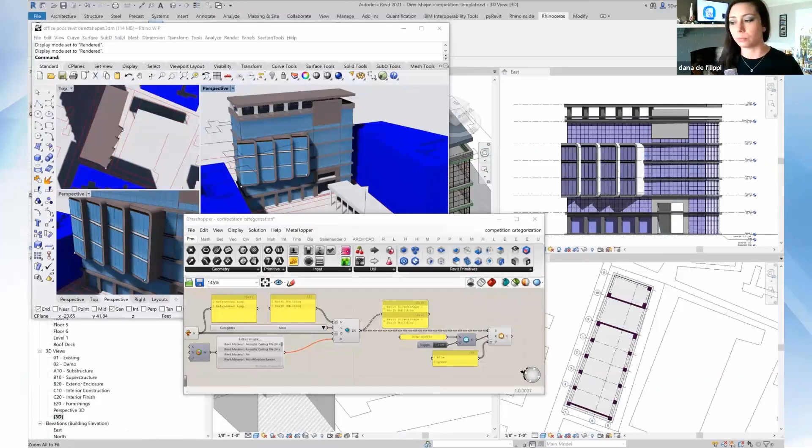So without further ado, today we have a really, really awesome presentation. Very, very excited about it. Rhino-Inside.Revit. And today we actually have two of McNeel and Associates. We're very lucky to have them. First off, Scott Davidson. He's in business development at McNeel. You can find him on LinkedIn there. And also Ehsan. Ehsan is amazing. Hopefully you guys have heard of Ehsan by now.

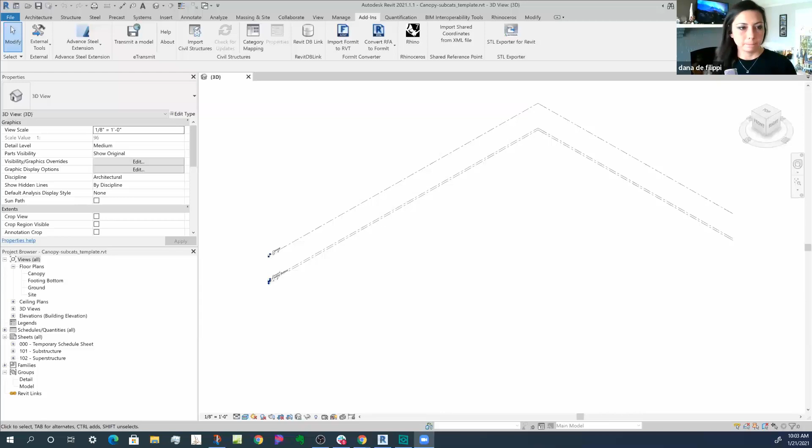I guess we'll give a little presentation today about Rhino Inside Revit. And then hopefully it'll be short enough that we have a long time to discuss, and Ehsan and I can answer any questions you have, whether about what we have or what we're working on or what our plans are, all those kinds of things. And just so you know, Ehsan's the Revit expert here, so I'll do my best as I struggle through this, and then we'll go from there.

Hopefully everybody can see my screen, which is Revit. So let me just give you a quick background as to what's happened and what Rhino Inside Revit really is. So Rhino 7 was just released a couple months ago as a commercial product. So it's out of beta, it's in release mode.

And Rhino 7 has a special property to it in that it can be embedded inside other applications. There's a connection to Tekla, it runs inside of Unity and Unreal actually, and different places, BricsCAD, things like that. But one of the most exciting ones, ones that we did early on and discovered that it actually worked, is we're able to now embed Rhino inside Revit's memory space.

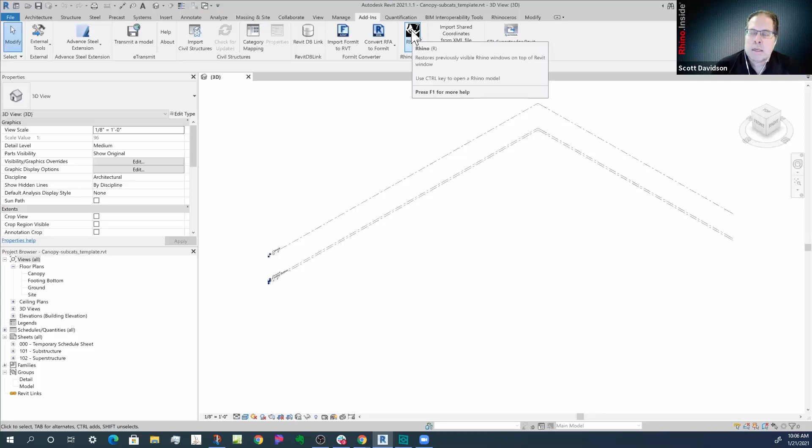And what that does is it adds, on the add-ins tab, this little Rhino button. And it's important to understand that normally when Revit starts up, you'll get that button, but it doesn't use a Rhino license yet. Once you click on this, it will try to load Rhino and Grasshopper inside Revit's memory space. And if it's successful doing that, it will come up with this toolbar.

And there's different things that you can do here. You can start Rhino, which we're going to do in just a second. We can import 3DM files directly using our 3DM importer as opposed to the one that comes with Revit. And we can categorize things and put different direct shapes and categories. We can turn off and on preview. We can actually edit Python here.

This is actually the Rhino Python editor, but the Rhino Python editor can access both the Revit API and the Rhino API simultaneously. So you can actually write Python scripts now that include both APIs and both calls, and you have the whole of the Rhino geometry kernel available to the Revit API in Python and in C# for that matter. So we can start Grasshopper and some other pieces here.

We also have what we call a Grasshopper player, which some of you might be familiar with players in Revit, so you can write commands with Grasshopper and just play them. Another important piece, as we talk about PyRevit: PyRevit has the ability to make custom toolbars, and those can include Python, Grasshopper and Dynamo scripts. So you can create your own custom toolbars with all your custom routines with PyRevit and Rhino Inside.

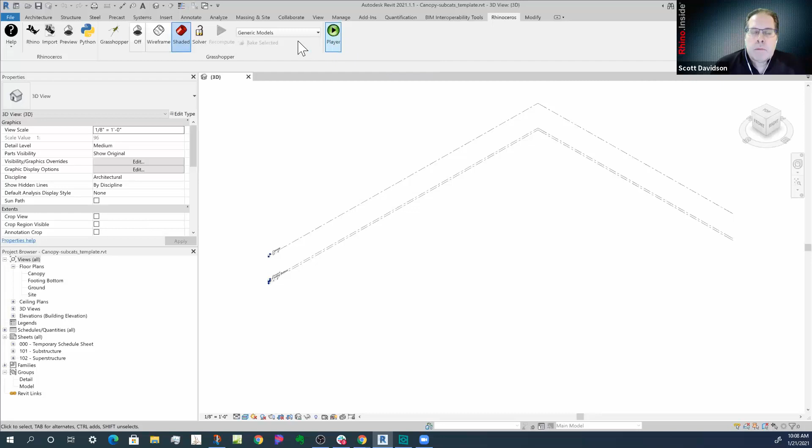So let me just show you how this works really quick. When you start Rhino, you hit here and it starts up Rhino. This is just standard everyday Rhino 7, but it does know it's running inside of Revit. And so when I start up Grasshopper, there's a few new toolbars that come up when you're inside Revit. So this is Grasshopper running inside Rhino inside Revit. So it starts to understand the stack there.

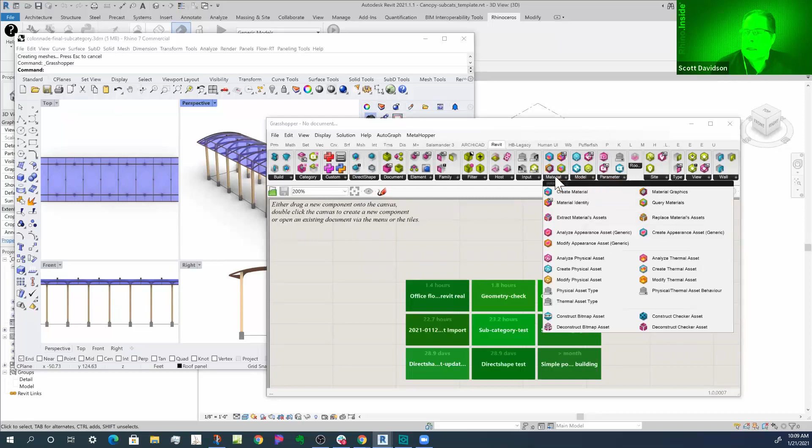So you can see we have different kinds of Revit primitives here that we can access directly through Grasshopper. We also have a Revit toolbar, which has things like being able to add beams and columns, deal with categories, create direct shapes, deal with families. We can interrogate elements, and we have a really extensive way of working with Revit materials directly. So you can actually use Grasshopper as a material editor in Revit, which is fun. We can deal with parameters here.

We have a whole section on walls because walls themselves are a fairly sophisticated category or family, so they have their own piece here. And we keep adding to these. These are things that we continuously add to, so there'll be more and more of those. But that's where you find how you can do things in Revit.

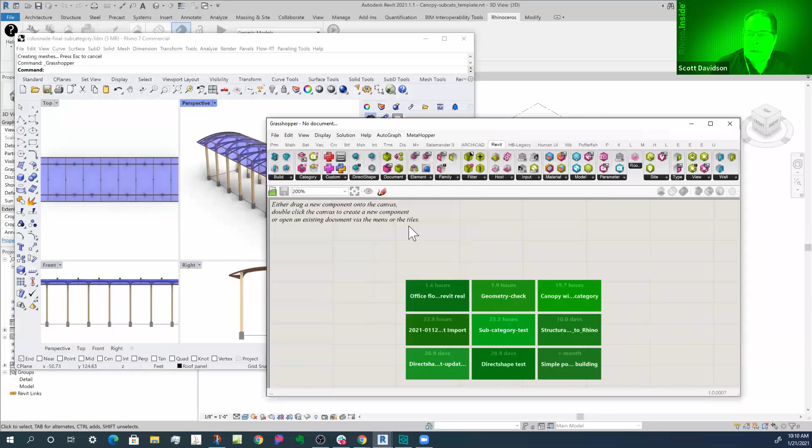And so let me just open an example here so you can kind of get an idea how this works. I think we'll start with this one here. One of the things we were trying to solve at the very start of this was people were complaining and wondering, how do I get my Rhino geometry? A lot of people use Rhino for design. How do I get my Rhino geometry and move it into Revit? And so this is kind of the initial question, and we can do that in a number of different ways.

And this is one of the nice parts about this connection now, is that you can do it with direct shapes. I have examples where we're throwing 100,000 elements into direct shapes. It's very, very quick. You can use them in drawings really quick, for a competition or something like that. But we can also be more rigorous or intentional on how we get things across.

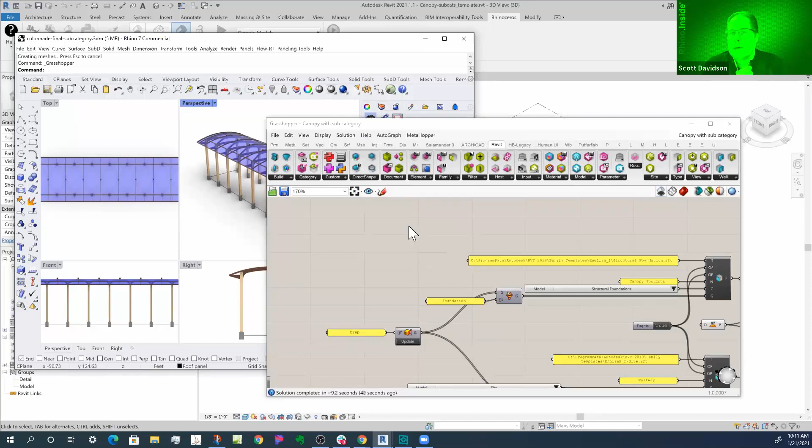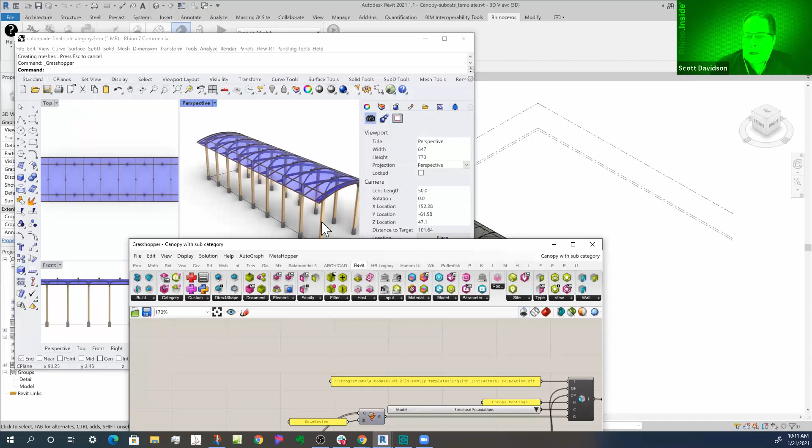And so in this case, what I have is, let's say this is a canopy here that's custom built. It's going to be dropped out on site. And one of the things I need to do is I have these footings that we need to have the footing person kind of put in. And then we're going to have this other piece fabricated and we're going to drop that in. So the Grasshopper definition can actually reflect that.

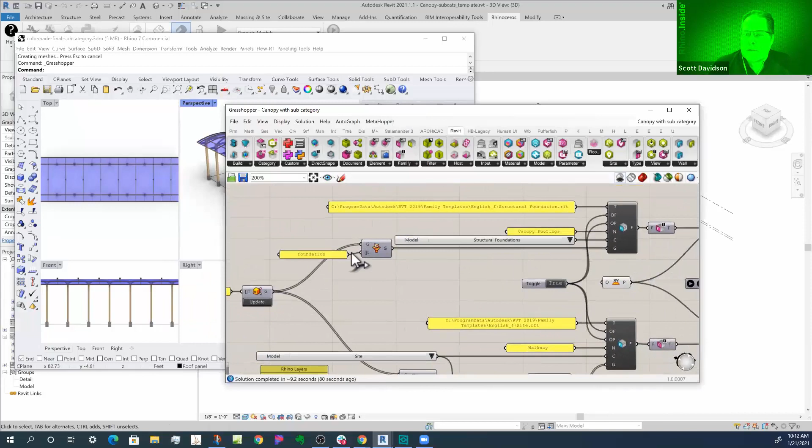And again, I'm using Elefront, which is a plugin for Grasshopper that's free. And it allows me to select objects by type over in Grasshopper or Rhino. So in this case, I'm grabbing all the B-reps. I'm finding everything on the foundation layer, which are all these concrete pieces there. And then what I'm doing is by going to family here, I can create a new component family. So that's right here.

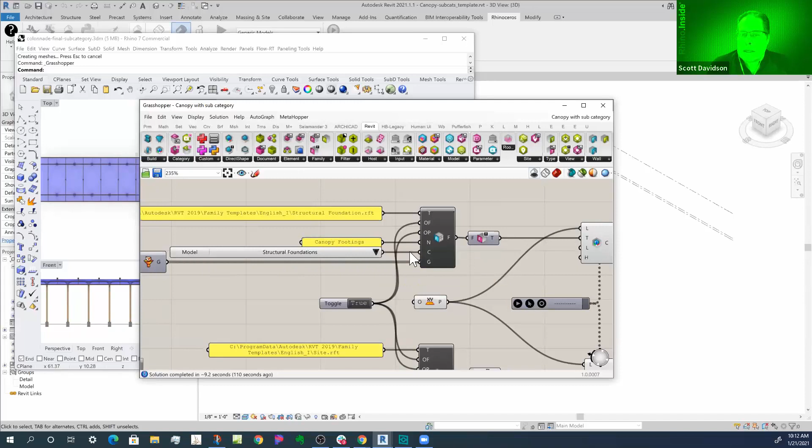And the new component family is going to be a structural foundation template here. You can see that. And it's in the structural foundations category. And then it's named canopy footings. And so what it does is it takes all that geometry, wraps it up in a new family. Of course, those of you that are really familiar with Revit know that you don't insert families, you insert types. And so we have a little unit here that goes and finds the types in this family, which is only one because it's a component family.

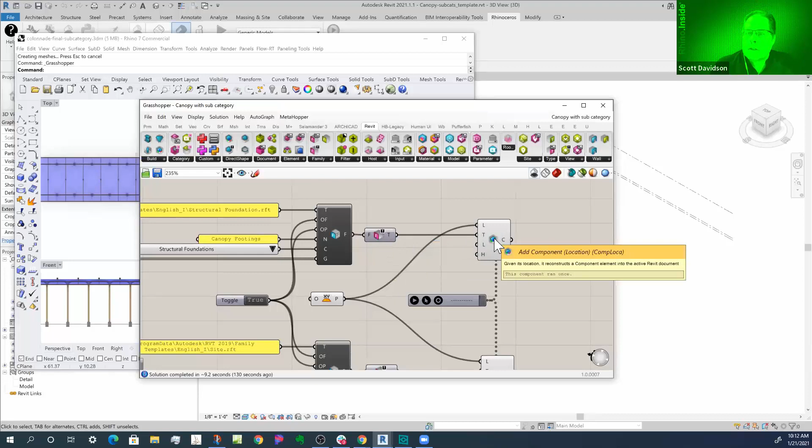And then what we can do is we can insert that family into Revit. And so you can see here that we have these footings here. They're a component family. Each one of these could have been an instance, by the way, of a single type, but in this case I was lazy and I made them all one. But you can see we have the canopy footing here.

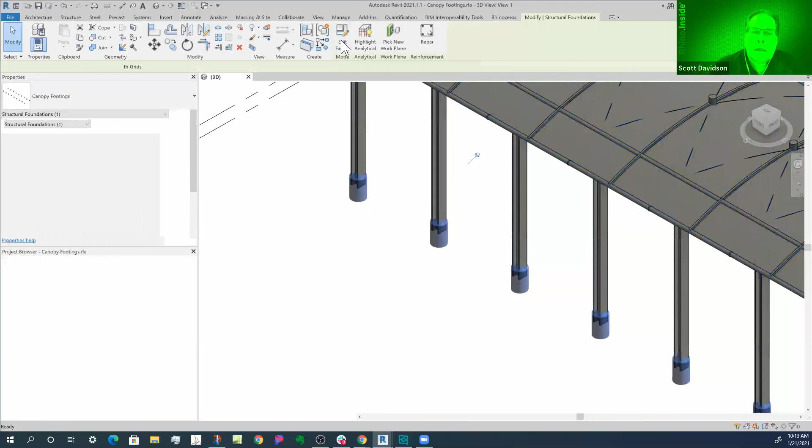It's structural foundation type. And what I can do, which is really interesting here, is because these are B-reps in Revit now, I can actually edit this family here. I can grab these objects, and there's some light editing that I can do to these, even if Grasshopper and Rhino weren't around. Now I'm not going to save this change because of course Grasshopper is in control right now. It'll just change it right back. And I can disconnect that connection. But you can see that I can make real families with real geometry through this.

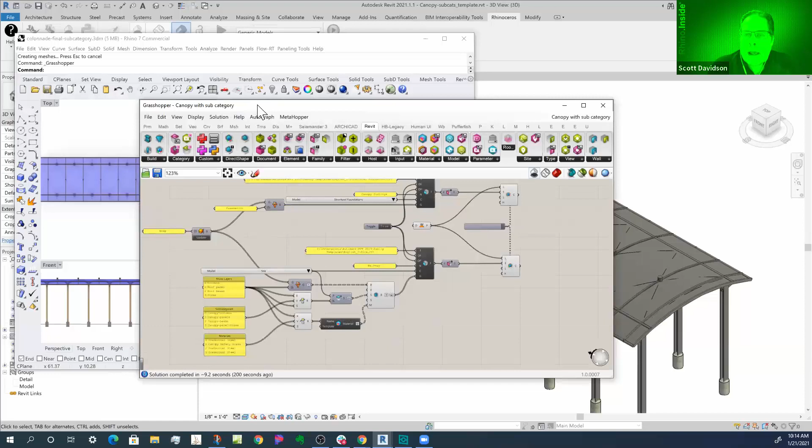And so I'm just going to close this, and we'll get back to the overall model, hopefully. And so there we go. So now let's take a look back at a little bit more about this definition. So I'm over on this side, and there's a lot more happening in the rest of this. I've got some roof panels and some columns and things like that.

And so what I can do here is, using Elefront and some other filtering, we can go through and I can actually say, here are the layers of the objects in Rhino. And then I can map those to subcategories in Revit. And so here's the subcategories I'd like to use right here. And in fact, I can actually assign materials to those objects too. I do a little sorting of those. And then I can create the subcategories if I need them.

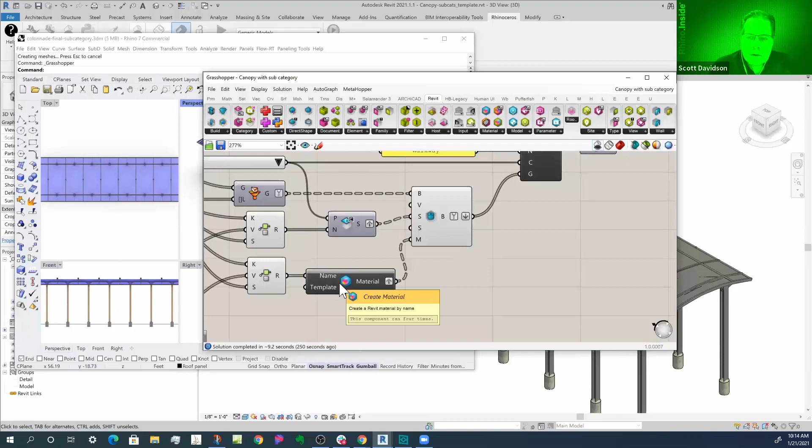I can also create the material names if I need them. If they don't exist, they'll get created. Then I push those all into essentially a form mixer, which mixes all the subcategories with the forms and all those pieces.

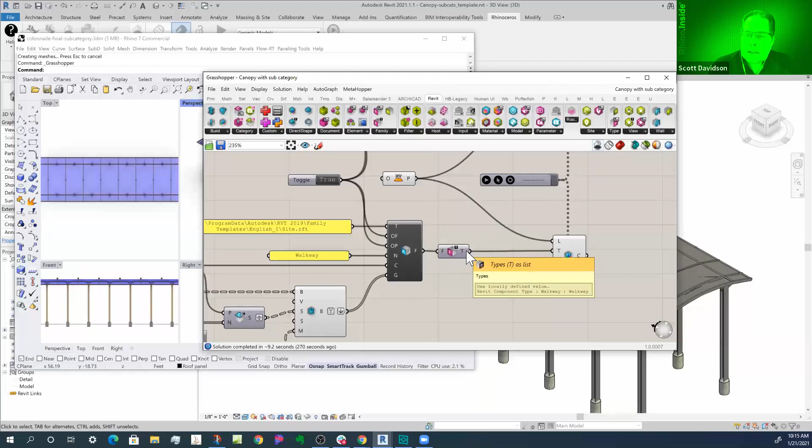Then we get to the family again, a new family. This is on a site family because I'm going to use subcategories, so I've got to find a category or a family I can use subcategories on. We're going to call it walkway. I mix that all up, find the type like I did before, and insert it. And what I get over here is a family with all the different subcategories and pieces like that.

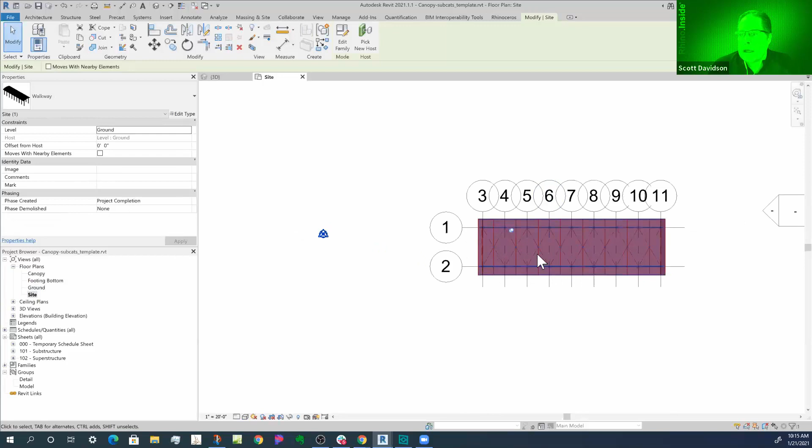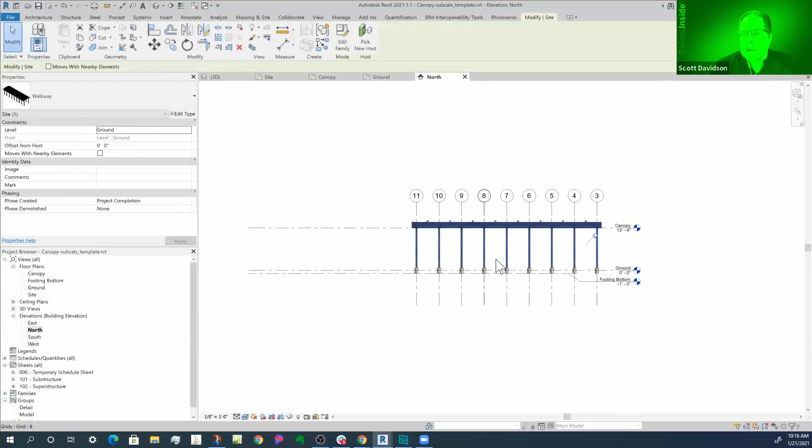And then you can see what I can do here, using subcategories, let's see what I get here. I can go through and actually change graphically how these things look based on the different subcategories, using view filters and all those things. So you can really start to inform the BIM model, create the BIM model in a way that works well in your Revit schema. That's one of the big advantages you have here.

And of course that can change over time. For instance, you might have floor plates that are official, but you might still be working on the facade. So the facade might be direct shape objects, which you're going to use temporarily until the facade settles down in the design. So there's a lot of options here for your workflow.

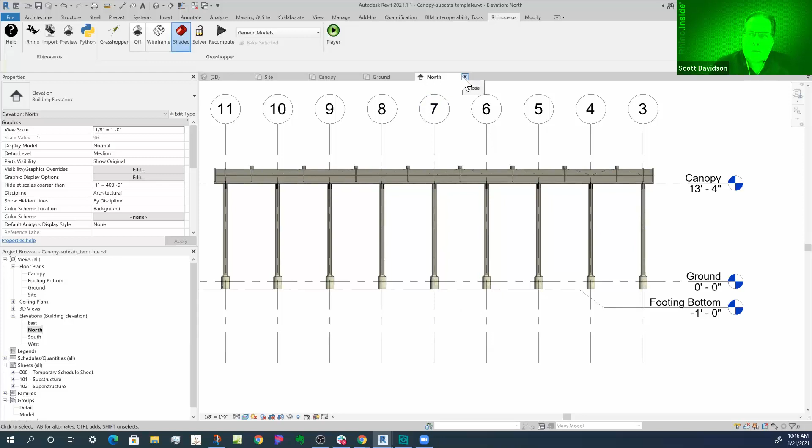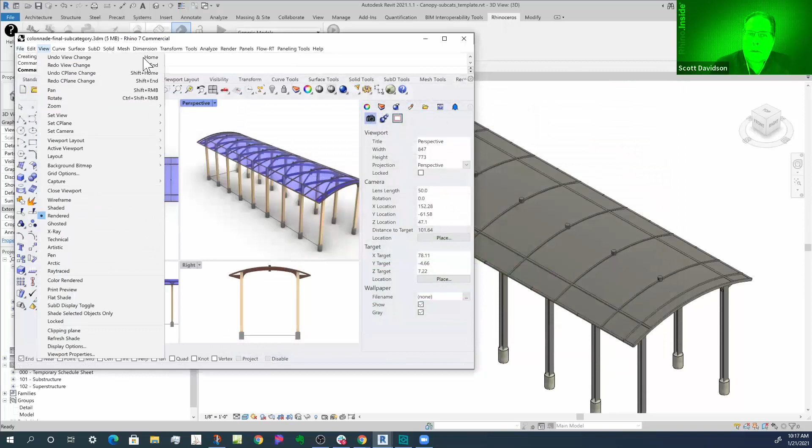Now, we don't just do forms and we don't just do direct shapes. We can also drive native families, system families. So I'm going to jump out here and show you how we might do that a little bit. I'll close this. I think we'll leave that one open for right now. Let me close this and get on to a different template here.

So when you move on to doing native objects in Revit, a lot of times instead of just moving the geometry over, you're going to move a piece of geometry in Rhino over, and by the way, this is not just the geometry, this is all the parameters too. So you can add all the data that you want from the Rhino model into the Revit model. But you might just move a curve over, for instance. So let's open that up and take a look.

So I'll open, yeah, that looks about right. You can see here, instead of having all the final geometry, we just have some curves and points and things like that. So I'll go a different way. Instead of just taking geometry over and making families, this one is going to actually drive some native objects, some system families.

In this case, I'm going to take some floor curves, find all the curves on floor and all the curves on roof. Then I'm going to find the name on those curves and the elevation of the curves, and create a new Revit level. So we go over here, I have a level. I can add a level, and then it creates that level, named that.

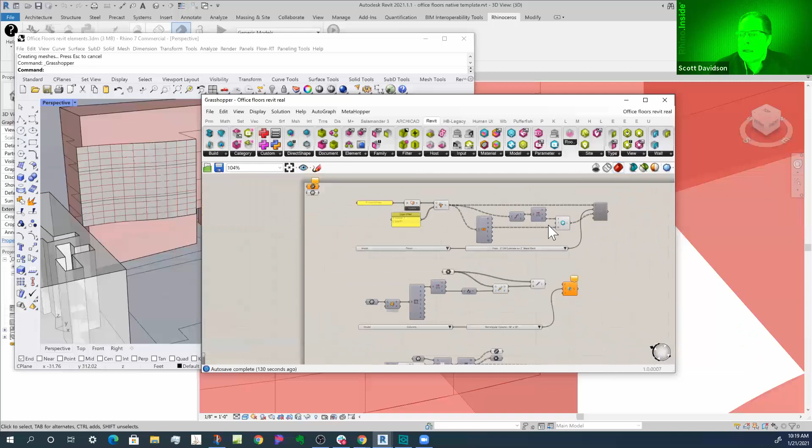And at the same time, it's going to create a floor, which is a native floor using a standard type in Revit. Here's all the types that happen to be in this model. And then I'll just enable this here. It's interesting what happens here. It takes those curves, which I could have picked, but I just filtered for them on the layer, and it creates the native floors in Revit here.

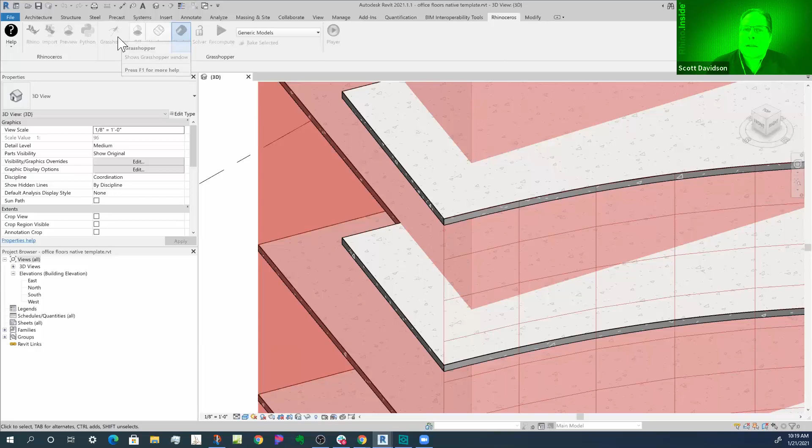You can see they're native floors. You can't tell that these weren't just created by hand in the first place, except Grasshopper's in control at this point. And what's interesting too is those floors are previewed back in Rhino. So it's the curves in Rhino, the floors created and existing in Revit, and then previewed back in Rhino, which is kind of fun too. So you can see how they're both updated all the time.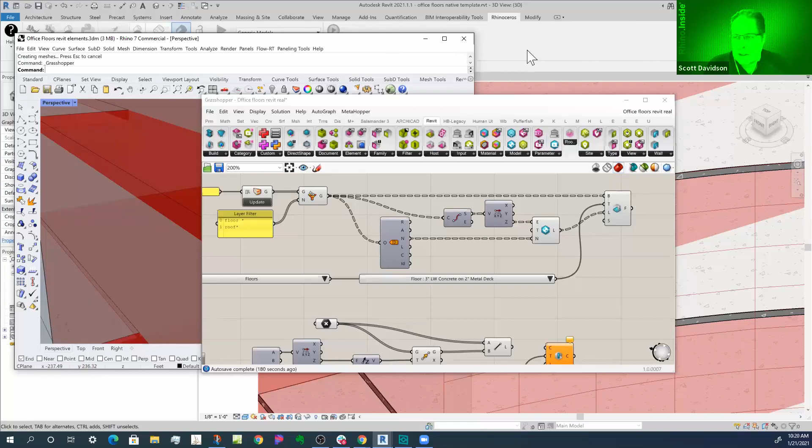What's nice about this is, if we were to disconnect Rhino and Grasshopper from this and somebody wanted to change this, like I did before, we can pick on this. I can go and edit this floor. Let's see here.

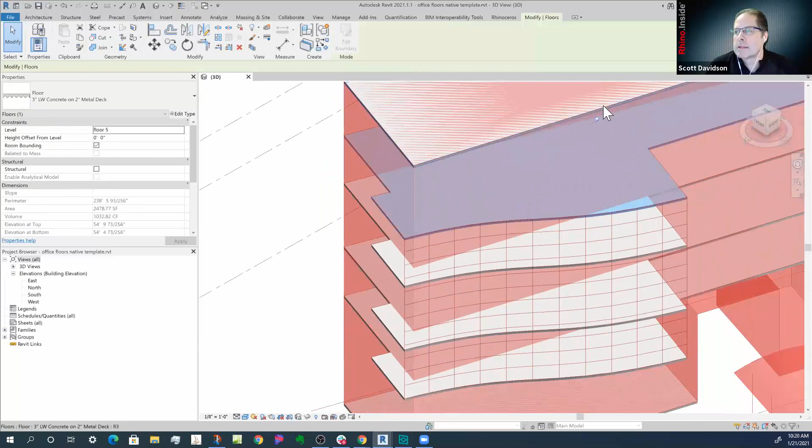Oh, I can't edit the floor right now because... Scott, I think you have to unpin it first. Oh, yeah, thanks. See, I've got to remember all these things. That is an important piece of this: when Grasshopper creates objects, everything in Revit is pinned. So if you want to edit it, you unpin it, and that way you can get to it

directly. And then we can edit the boundary, and you can actually see if I go in here and click on this, it actually gives me the dimension. And so I could edit that, and it actually edits with Revit. That originally, of course, was a Rhino curve. But let's say that you disconnect Grasshopper and it's gone further downstream in the project, you have this kind of ability depending on how you make the thing.

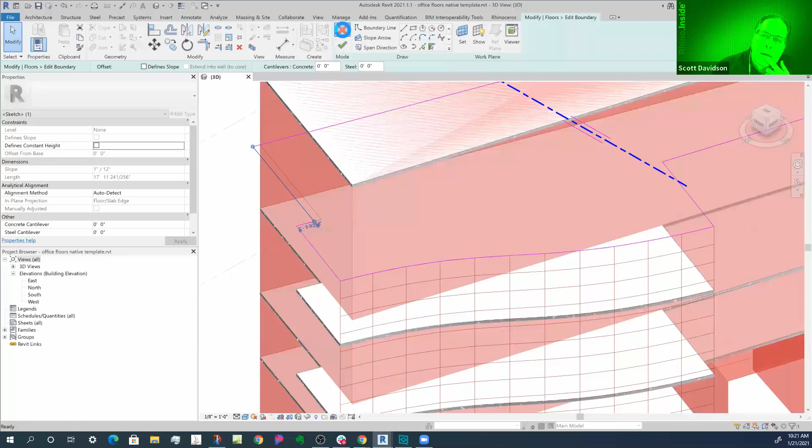Again, I'm not going to save that change because Grasshopper is actually still in control. So I'll just disconnect that edit. But that is the kind of level that you have. So we can do floors, and these levels here were created by Rhino and Grasshopper. Grasshopper named them and created them on the fly. So you can keep all that in sync. This also goes the other way. You can take levels and bring them into Rhino if you want to.

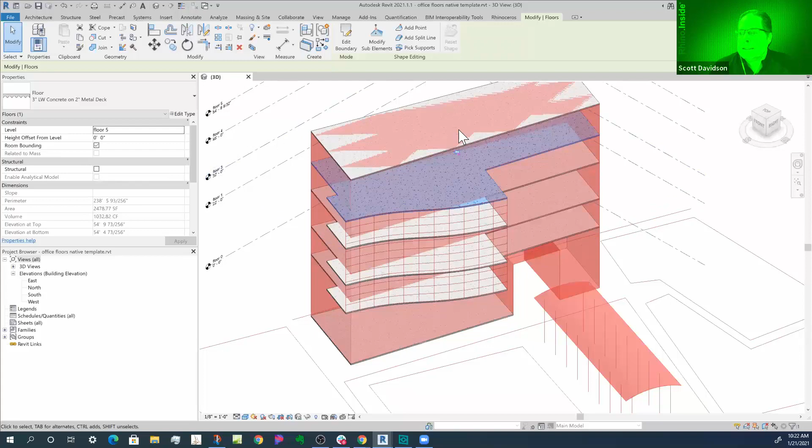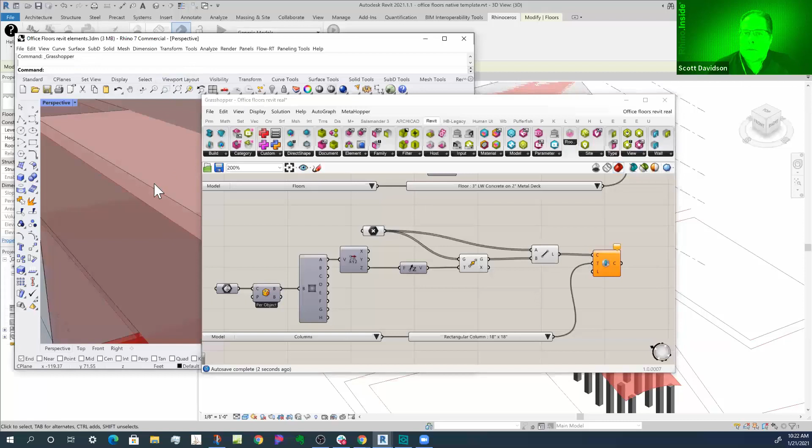Just the last piece I want to show here before we get on to your questions and answers, because we want to make sure you have a lot of time for that, is I can just take some points out of here and create some columns with them. So the points that were in Rhino, you can see they're right here, and they just created the columns. What's fun here is if I'm in Rhino and I edit this roof height, you can see that the columns in Revit respond. So you can set up some active ways of these two working together.

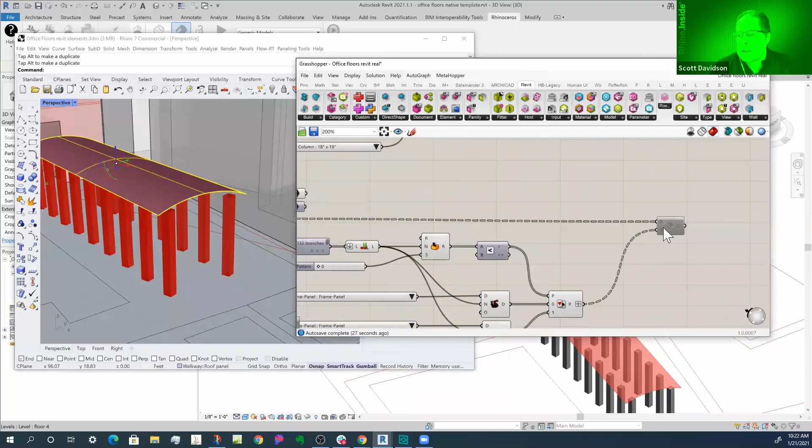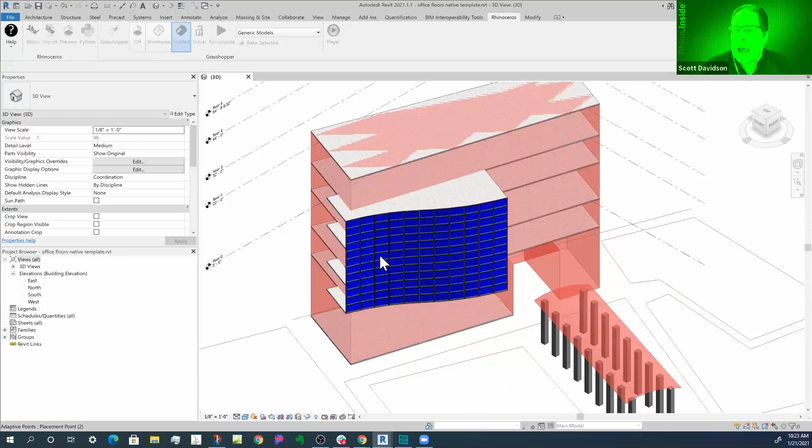Another way you can do this is if I want to drive adaptive components. So we'll just go in here and I'll enable this. So we can drive adaptive components through Grasshopper. That'll just take a second to populate. And so you can see that in Revit, the adaptive components were created here. And then if I come in here, we can have some fun with this. These are previewed. Instead of using the same adaptive component, what I can do is have Grasshopper randomly place two different adaptive components.

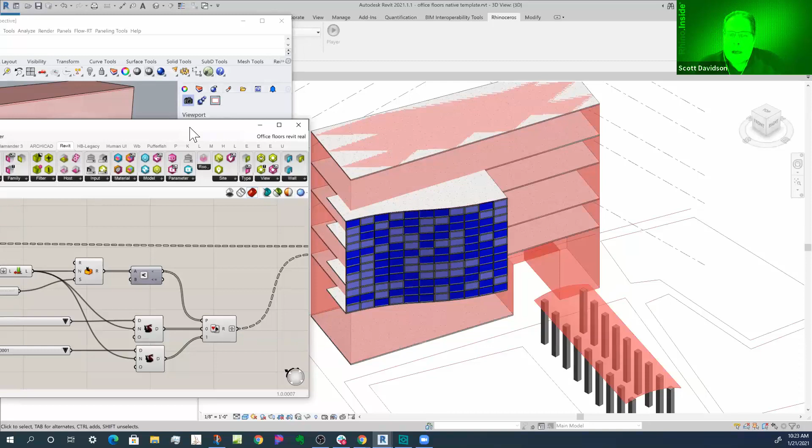And so you can see that it can just randomly do this, or you can have it react to where it is on the facade and have Grasshopper select different adaptive components on the fly. And in fact, I have a little slider here that will look at different random patterns that you can go back to. So in this case, this is Grasshopper driving Revit's adaptive components in real time.

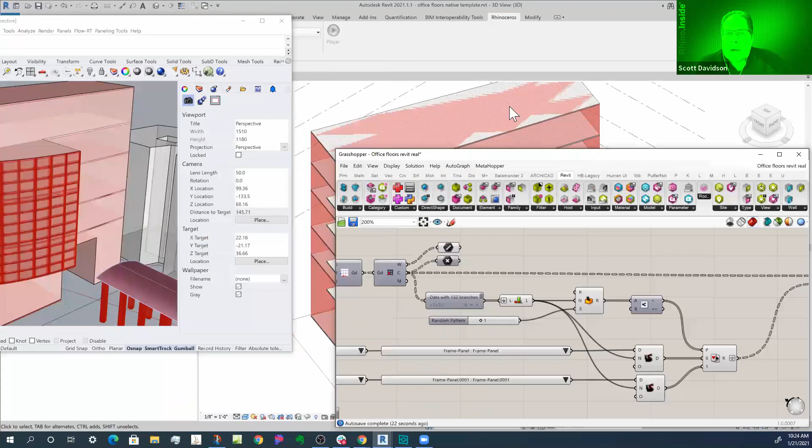And so there's a lot of options here, but what's nice about doing some of the methods this way is, of course, these are standard Revit system families, creating real Revit objects. So Revit's doing the generation of the geometry, and then all the parameters that come along with it. That's all possible. So anyway, that's just a quick overview of some of the things you can do.

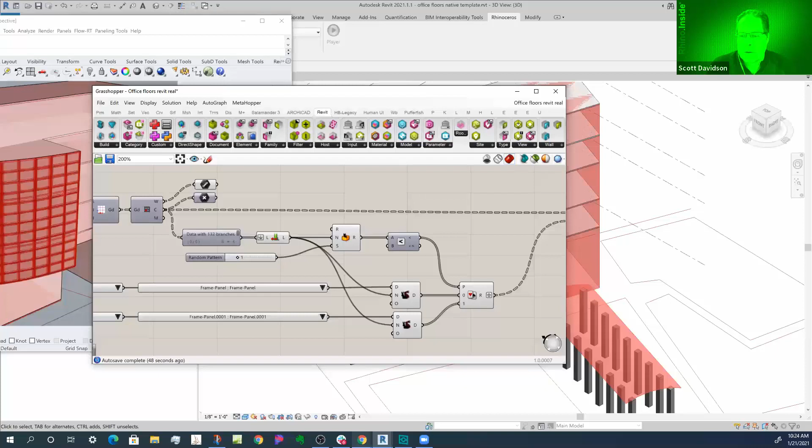If you're interested in more of this, the Rhino Inside Revit website is the place you want to go. And I want to point out three different places. There's the Getting Started article, which talks about install. There's guides. These guides talk about, for instance, how we deal with walls in Revit, how we deal with doors and windows, adaptive components, rooms and areas and spaces. And we're still working on this website, and then from right here is Rhino to Revit.

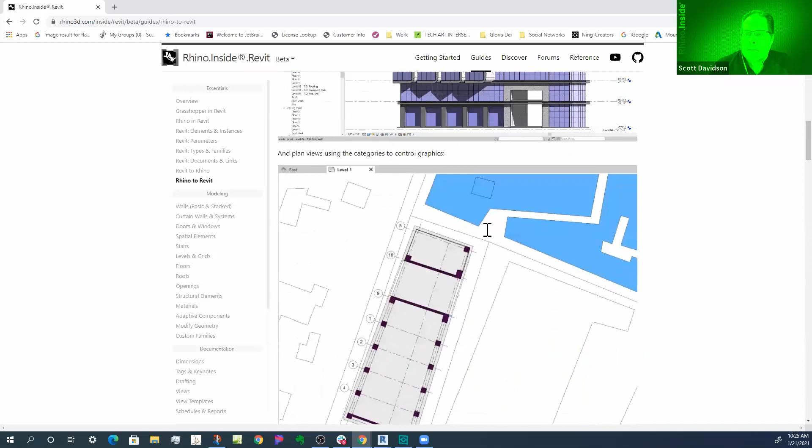This is the most popular guide by a long shot. It talks about how to create direct shapes, how to create loadable families with subcategories, and how to do native Revit elements. A lot of what I showed here today is in this guide, and it also covers different pieces and what you can do. I highly recommend, as you're exploring this, get to this guide and you can work from there.

Another thing we have, which this video may end up on at some point, is if you go to Discover here, there's lots of different resources from people in the community - different demonstrations, tutorials, discussions about how it's useful, all those kinds of things. Some people you will recognize because they've been on your cast here. We continuously are adding to this, so that's the Discover page and a great place.

You can see that Marcello, who I think talked about a few months ago to all of you, there's a Revit Grasshopper for Revit manual, and it includes Dynamo too. That's right here. But there's a lot of other resources too, so I just want to make sure people knew kind of what the important selections were.

The forums, if you want to get a hold of us, are right here, and we're on the forums all the time. So anyway, that's what I have for this presentation.

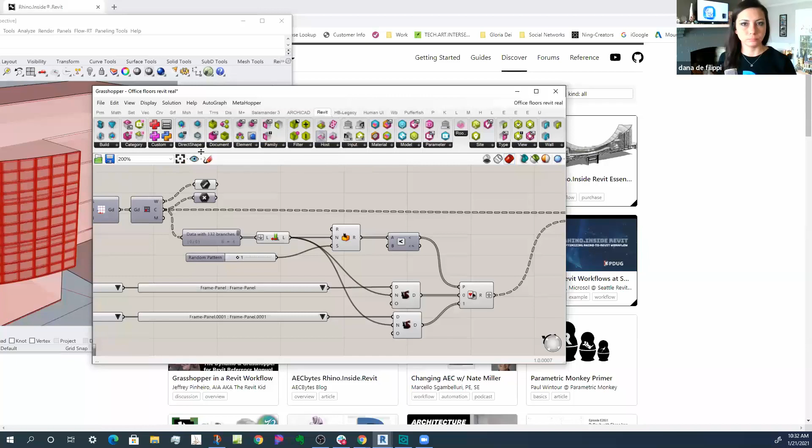Somebody's asking, confirming Rhino Inside only works with Rhino 6 and 7. So Rhino Inside depends on a new piece of technology that's introduced in Rhino 7. It's not going to work with Rhino 6.

The developers for Rhino 7 sort of took apart a good piece of Rhino and put it back together in a different way, so it could be embedded in other applications as an add-on. Rhino Inside Revit was built on this technology that's available in Rhino 7. It's really asking Rhino to load itself inside the Revit environment, and it also launches Grasshopper. This Rhino Inside Revit piece is really the add-on for Revit that can talk to the installed Rhino you have on the machine, get it to load inside Revit, load Grasshopper, and it also adds all these components that Scott showed you.

These are the components that come packaged with Rhino Inside Revit to support Revit workflows inside Grasshopper. We joke about it all the time, but there's a little secret: Rhino actually is Rhino inside Rhino. It calls itself to load itself. So what's nice is that all the technology we're using for Rhino inside Revit is something we use ourselves for Rhino, which allows it to get tested and keeps it up to date, which is really nice.

There's another question about work sharing that Dan is asking — these same work sharing rules apply. As Scott showed you, our focus with Rhino inside Revit is to build as many components and workflows as possible that support creating and querying native geometry in Revit. So the goal is not to bring all these crazy shapes and geometries inside Revit that Revit really doesn't understand.

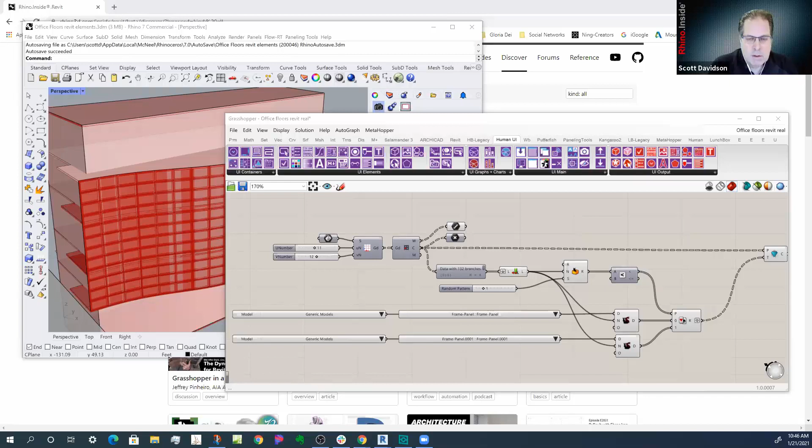If you install and take a look at Rhino inside Revit, all the components we have in the Revit tab, you'll notice we have a lot more query and analysis components compared to create components, as we like to call them - components that let you create native Revit content inside Revit documents. We have plenty, but there's still a lot of work to be done in that department.

Part of the reason is that getting stuff inside the Revit model in a way that Grasshopper can drive, and that's intuitive for the user, so they can tell Grasshopper, hey, it's okay, I can take care of this piece of content from now on. And also, when another instance of Grasshopper opens on somebody else's machine, it can recognize that piece of geometry, that piece of model that is Revit native, is not something Grasshopper itself creates - it asks Revit to create that. So that has always been a challenge.

We're calling this feature element binding - the way Grasshopper remembers the content that it creates. This feature is in the testing phase, so we should be able to publish it soon. Once this feature is inside Grasshopper, we'll be able to focus on a lot more create components, because now we have element binding as a backend, and it would also be accessible to all the scripted components that we have.

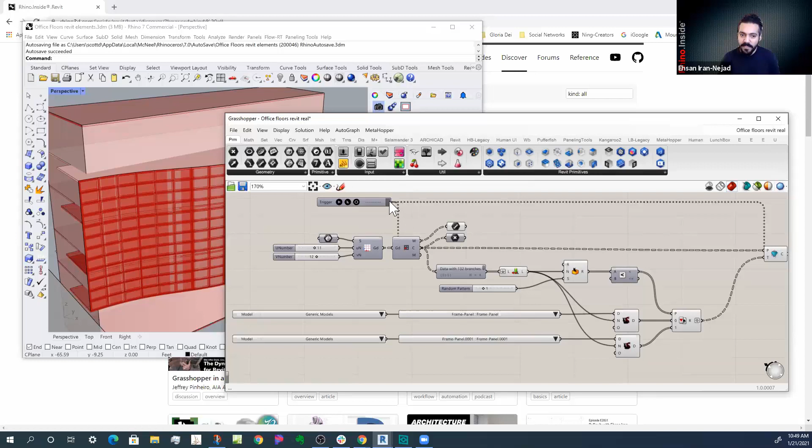We have a couple of really good components inside Grasshopper specifically built for this. Scott, do you mind showing them the trigger component that's new to Grasshopper? So this trigger component, I think inside utilities - this one. You can actually tie it to any other component in Grasshopper, and it specifically works very well with Rhino inside Revit aware components. It ties the actual function of that component to that play button that's there.

So you can do a whole lot of calculations and geometry modeling inside your Grasshopper definition, check it out, make sure it's good, and then hit play and let the rest of the definition take care of building all that stuff inside your Revit model. You can nicely separate these two pieces from each other, or have multiple pieces inside your Grasshopper definition, so Revit isn't a bottleneck all the time, since it takes more time for Revit to generate this stuff. You can play with them a lot faster in Rhino and just click on it when you're ready.

Yeah, and so in my case, in these demonstrations, what I do is I might take the Revit component and disable it, and then when I'm ready, I'll just enable it, and it'll generate the Revit objects. And so you can do it that way too. But this trigger is pretty nice because you can wire it up to as many components as you want, and you can trigger them all at the same time. So.

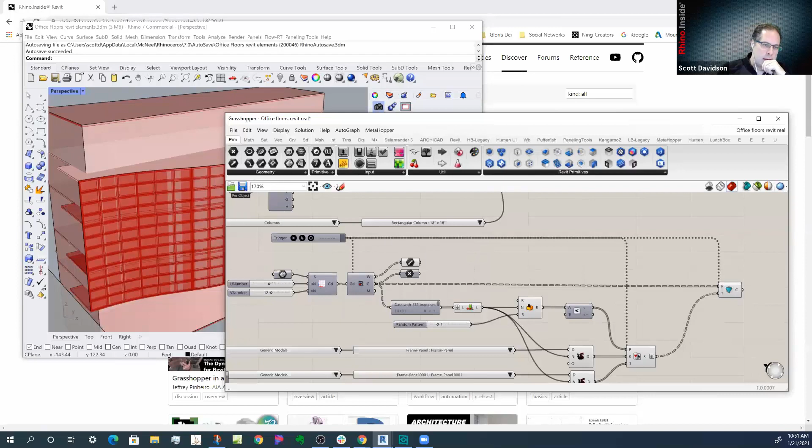One other question that I have, especially because we have a lot of Dynamo users like myself on the call. I feel like when I ask that question, especially to computational users, it's actually the exact opposite, right? They started in Grasshopper and migrated to Dynamo. So any tips that you have for us Dynamo users that want to learn Grasshopper, maybe some direct translations that would help? I'm going to share some links, the Grasshopper manual, of course. I'll share that link in the chat, but anything else would be wonderful as well.

Yeah. So I'd recommend jumping in with both feet. And so let's look at the Discover page. I guess the first thing to understand is that the guides here are broken down in a very obviously Revit-like way. And so it's a good place to start, depending on how you want to approach things, because this is mostly written by Ehsan. And so you're going to find a lot of these things here are going to make a lot of sense to you from just a Revit point of view, maybe not as much of a Dynamo point of view.

But if we go to Discover here, this manual, of course, is a great way to learn Dynamo too, 200 examples where on one page it's a Revit or Dynamo example, and on the facing page is a Grasshopper example of the same thing. And so it's not only a great way to learn Dynamo and Grasshopper, but it's also a great way to see how in some ways they parallel each other, and where, like you'll find some definitions, it's a little bit more complicated in Dynamo than it was in Grasshopper, or vice versa. And so that's one place to look.

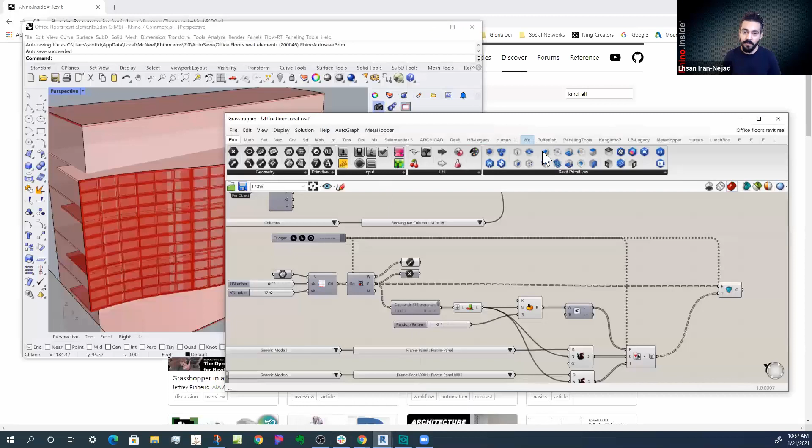And the rest of the create components are also coming. That tab that Scott is showing, it's all material components. It only supports the generic right now, but we're testing this with the users to make sure that the workflows are comfortable. And then we'll add all the advanced shaders that Revit supports as well very quickly too. So one of the crazy workflows that we've been working on is you can take bitmaps and you can take colors and lists of colors and you can generate material libraries through Grasshopper in Revit.

And because Grasshopper has plugins for V-Ray, you can actually generate V-Ray materials, and you could actually generate them both at the same time, so they're synced up. So you'd have Revit materials and V-Ray materials that match each other as much as they can between the two. So you can actually grab materials out of Revit, or you can generate new materials on the fly, and you can mess around with their color and the bitmap assets they use and things like that. The embarrassing part here is we actually in Grasshopper now have better coverage of Revit materials than we do of Rhino materials.